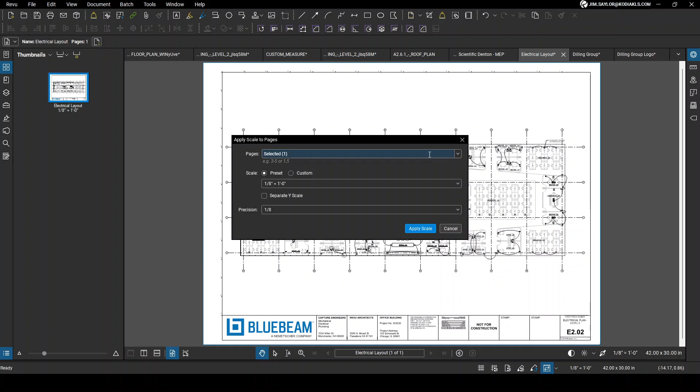Next thing I'm going to do is show you how to do a search for items or fixtures. On this particular drawing, we want to search for these duplex fittings. On your side panel menu, you'll see here next to thumbnails, all your options: Search, and then this is the text search. So if you were looking for, say, like 202 or meeting, you can type that in. If you want to do a visual search, you can click on Get Rectangle, and then you'll have the ability to select just that picture.

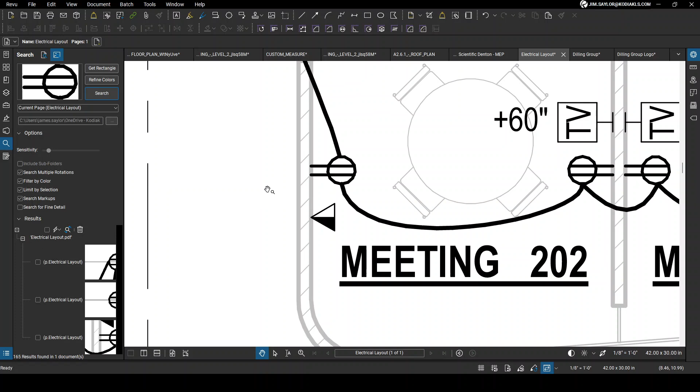We're going to keep it nice and tight, nice and clean. Then we're going to tell it to search. Takes it just a second. And now you'll see it search the entire document. And you can quickly scroll through and scan and look and make sure that it has picked all of the correct fixtures.

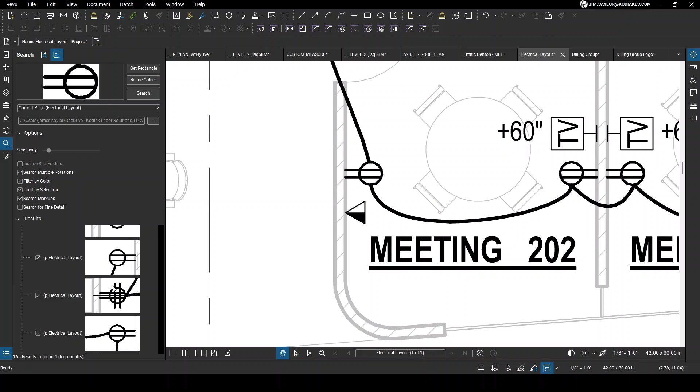So as you can see here, this is a quadplex. It's different. We're going to go ahead and select all items. And then we'll scroll down and unselect the items that don't match. We don't do that one.

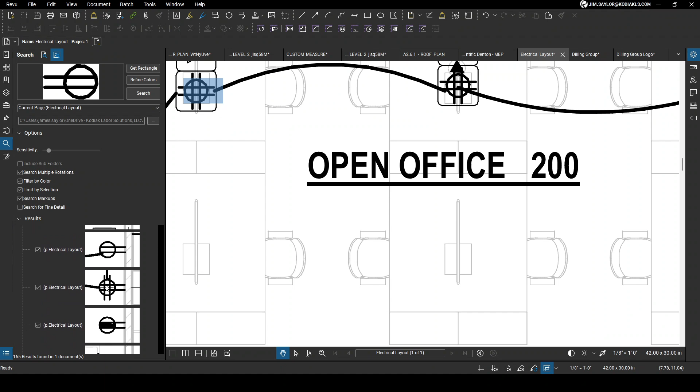This is going to save you a ton of time. Talking with some of the guys, they go through and manually highlight each item or fixture, creating a small box to mark it. This is going to be a lot more efficient. Now you'll still need to go over the whole print to make sure you haven't missed any, but this will definitely get you the bulk of it.

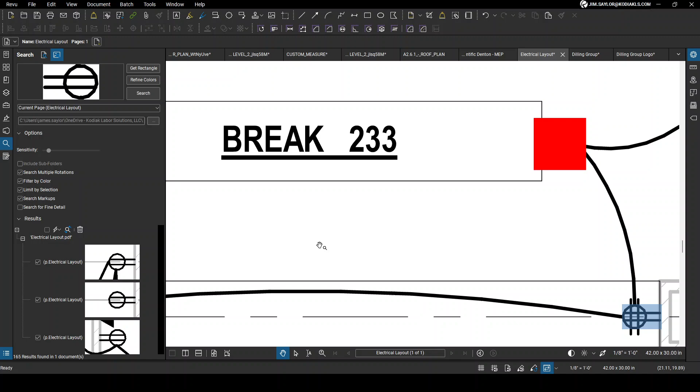All right, so I'm just scrolling back to the top. Now I'm going to click on this electrical icon here, check options. We're going to do an apply count measurement to check. We're going to mark all of these boxes as a square. Now every one of those boxes that it found will now be marked as a red square. You can see that saved a ton of time.

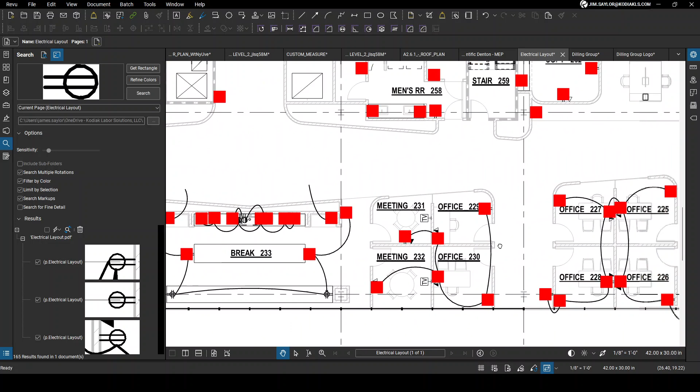If we select one, you can see it counted them. So there's 161. So we'll quickly just look through, see if it missed any. And if it did miss one, all you would have to do is right click on it, resume count, highlight that box that may have been missed, hit the escape key, and now you can see it goes to 162. So we added that one.

So now that all of these are highlighted together, so they're all in one count, if you need to split one of them out, you can right click on it. You can split count. Now this one item is a single. If you wanted to split them all, you could also right click and split all. Now all of them, all 161 of them would be individual. So we'll just go ahead and delete this one.

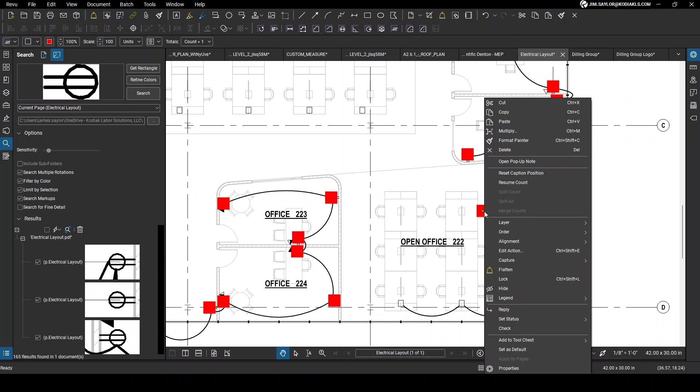And I can walk you through the editing functions for your markup. So if you click on the markup, you can see it highlights all of them because they are grouped together in a count.

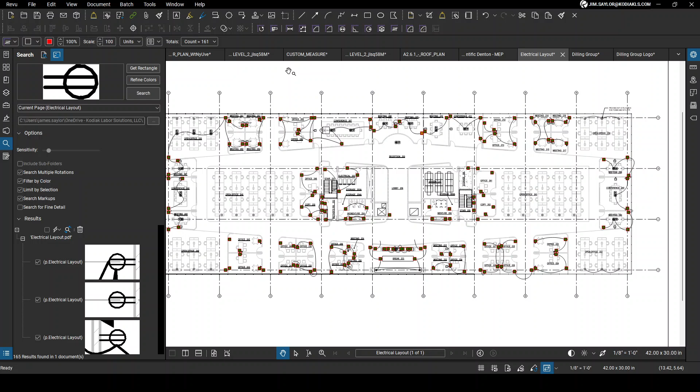You have your options of what you want that square to look like. So you can change the color of the square here. You can change the scale.

If it had labels on it, you could show the caption for it. And when you click on labels, you'll get the ability to edit the font and the font color and the style to go along with that. But we don't have any labels on it, so we're not really worried about that.

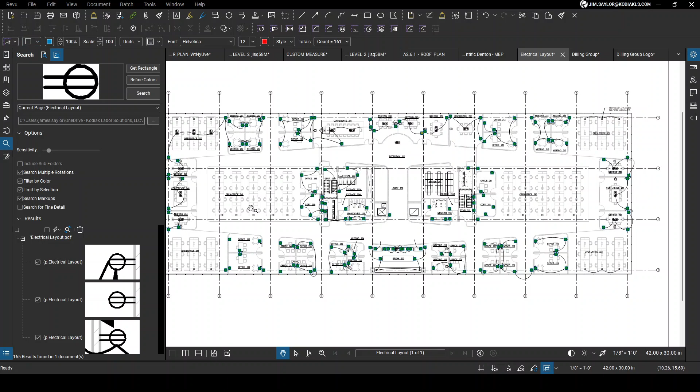So on this particular print, there were duplexes and quadplexes, so we have two different items that we want to search for. So again, I'll show you how to do a search. You want to zoom in, get a nice clear picture of one, so it doesn't have things obscuring the view.

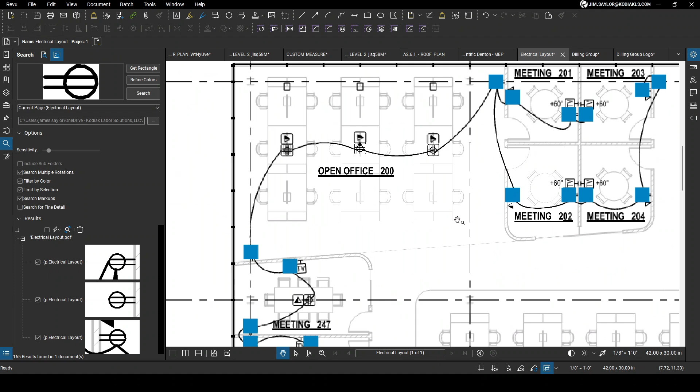And we're still in the search function, so we can get a new rectangle. Try to be picky about it. Make sure that you're getting all up to the edges.

We'll do another search, and we'll go ahead and select all, and we can quickly scroll through. See, it only found 4. Pretty sure there's more than that.

So we can do another search. Get a new rectangle, widen our search area just a little bit more. Do another search. Now we're only finding 3.

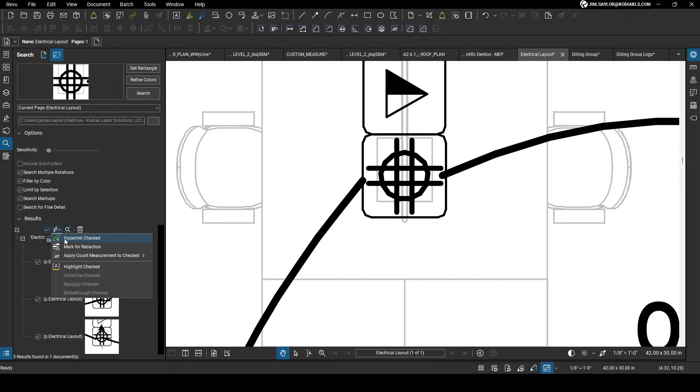We'll go ahead and we'll highlight these and apply the count. We'll still make them red square. Now all the red squares are the quadplex.

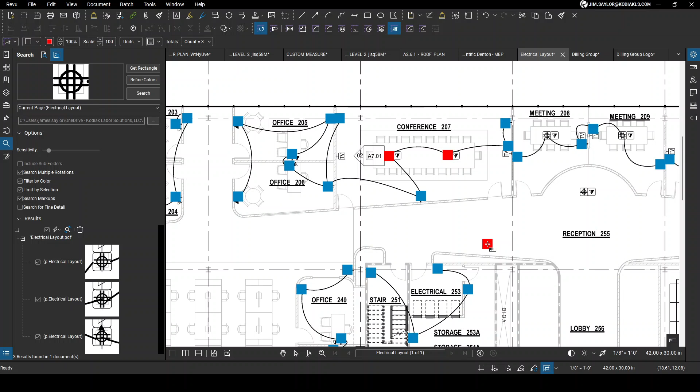And again, if you want to add, you can just right click on one, resume count. Here's one, here's one. You can see your count will go up when you escape out of it. And then hit the escape key.

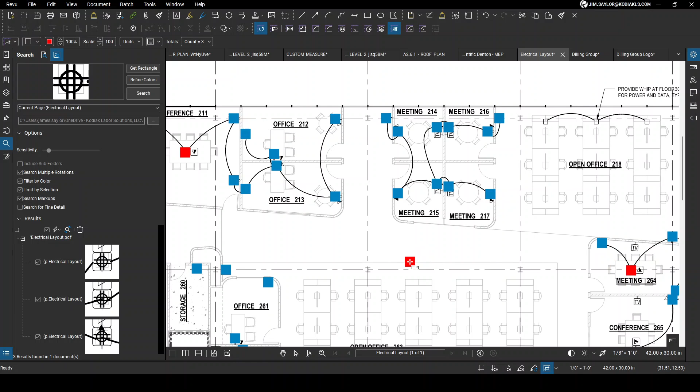So now you can quickly see that there are quadplexes in red, the duplexes are in blue. So the next thing you want to do is connect them with Redlines. We're going to get out of the search just by clicking on the icon for search.

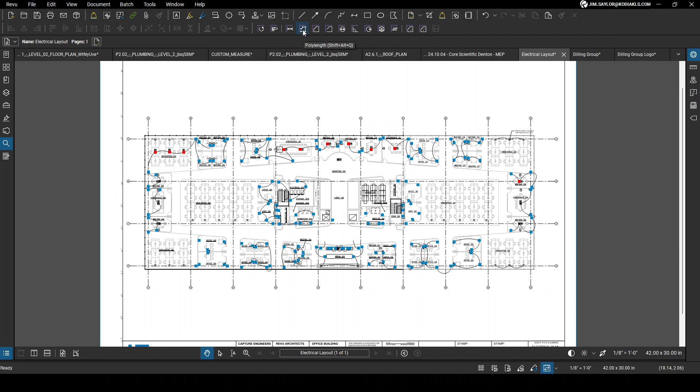And then we're going to create a new measurement redline. You go to poly measurements, that way you can do a continued measurement, or you can do a slope or depth measurement added onto a measurement. We're going to pick the poly.

We're just going to make a straight line, hit enter. Now we have this straight line. I'm going to hit escape so I can get out of the measurement.

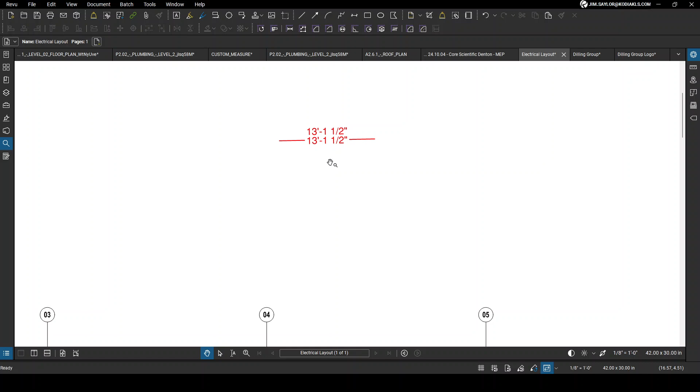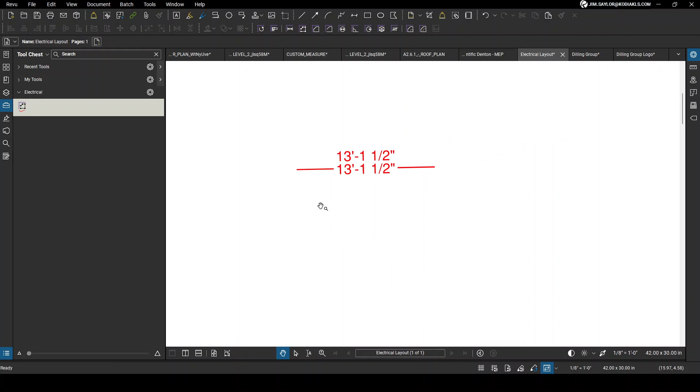Now we don't want to see the measurement and all of that, so we're going to click on our toolbox, our tool chest, and open that up so we can see where we're going to put it. And then we're going to click and edit this type of measurement. So again, the editing functions will show up at the top.

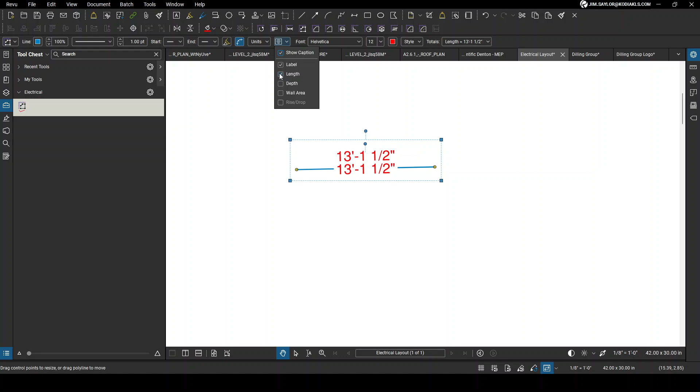You can change the line color. And we'll go back to that unit so you can see here, next to the unit. If you wanted to show the caption or remove the caption, you can do that. If you want the options of it, you can remove the length and the label.

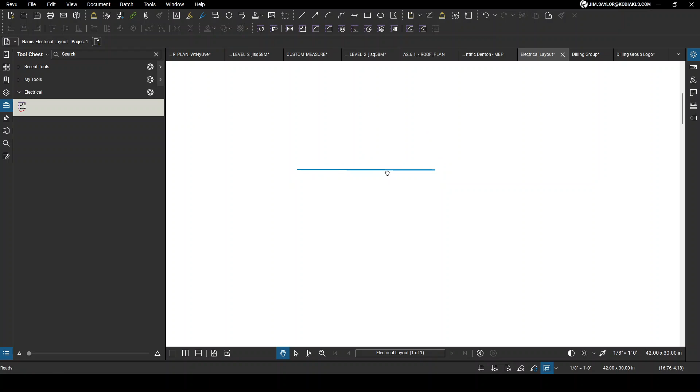We're going to add it to the electrical tool chest. And here you can see there's a difference between this poly length measurement and this poly length measurement.

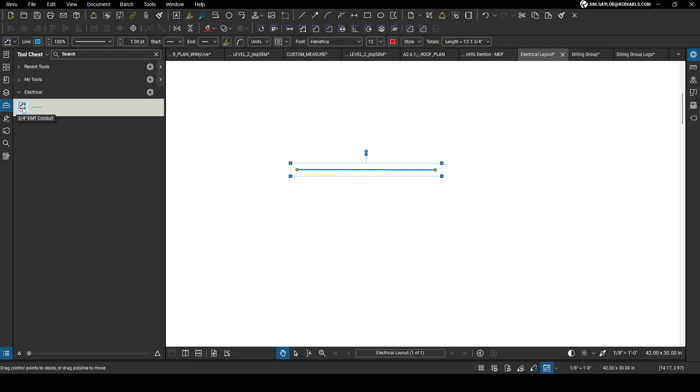This one I've already edited, and it's in a different format, which you just simply change by right clicking on it. And then you can click property mode, or you can right click on it, click drawing mode. To do continuous, we want to make sure that we're in drawing mode.

Now to further edit this, you can click on it. You can add it to the drawing. And then you can click this icon on the top, which is the settings property for that measurement that we created.

So we gave it a line color of blue. You could change the style of the line if you wanted. And what we really want to do is add in either a label or a comment. So we're going to call this a 1-inch EMT conduit.

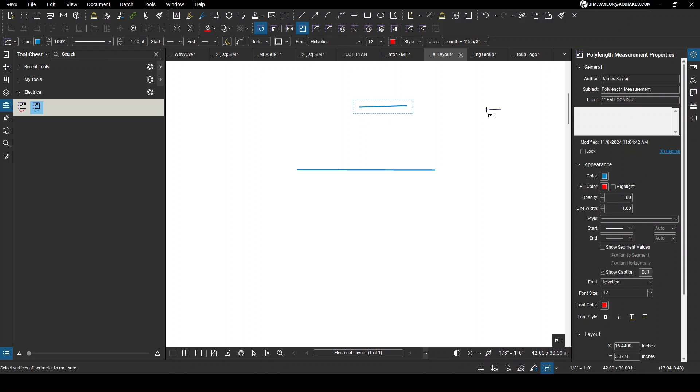Hit escape. Now you can see in settings, I've created this label, called it a 1-inch EMT conduit. That's a label. You can do your subject line as conduit. Since we're highlighted on this one, this is the one that we're actually changing. So if you click off and click on it, you'll see we still have those titles, or the subject and label. But if we click on this one it's still showing up as a poly length measurement.

So the settings that are within those, when you create them, stay when you put it on the drawing. So since this is the one that I really want, and it has all the labels, I can click on it, right click it, add it to the tool chest, and add it to electrical. The one that I created previously still shows poly length measurement 1-inch, but this one says conduit 1-inch.

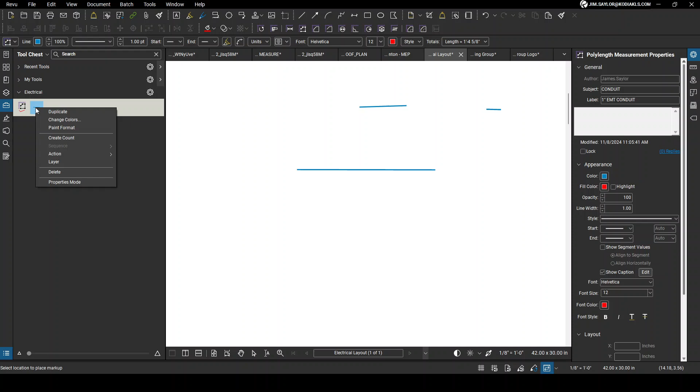So you can right click on that one and delete it. You can right click on the new one, change it to properties mode, hit the escape, and then we can just delete these. And then we can zoom out on our document.

Now the advantage to doing this, where you can create the line, click the next point, hit enter. The advantage of that versus just going up here and clicking on your line measurement - this doesn't have a snap to function. And once you've clicked on it, then you've got to go up and re-click on it.

And you'll notice in the markups list at the bottom, those are just 2 lines. You may or may not need measurement, but if you create the line as we created it with a poly measurement, you'll also get a list of the lines, the measurements. So you get a total measurement, you get an individual measurement in between, you'll also get the label, and you can export this.

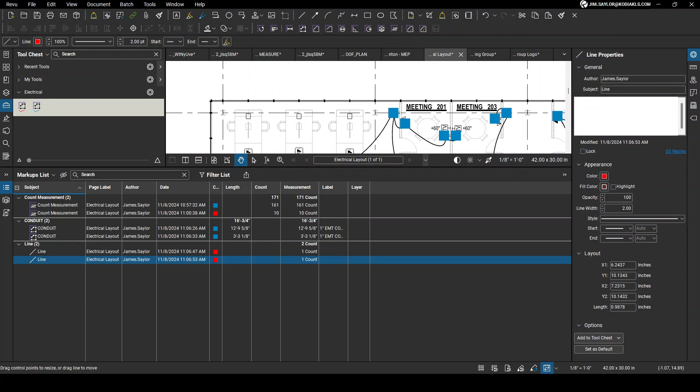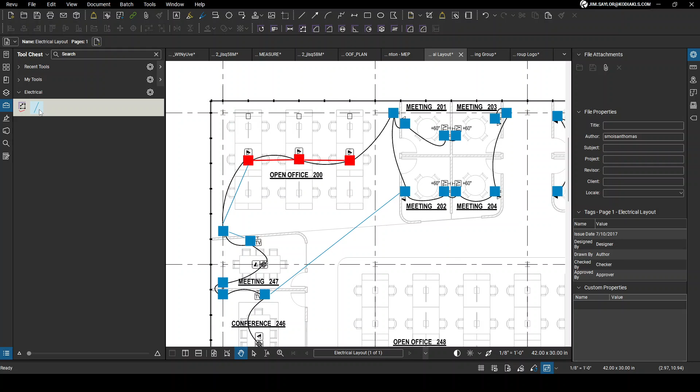Now, if you happen to have this changed to a drawing mode, when you click on it, it will bring down the exact same size line that you had created it under. You can do that, then you can drag it to points. It's just not as efficient. When you click off of it, you're going to have to click it again. So again, make sure that you have this in properties mode. It will make it much faster to be able to go through your document.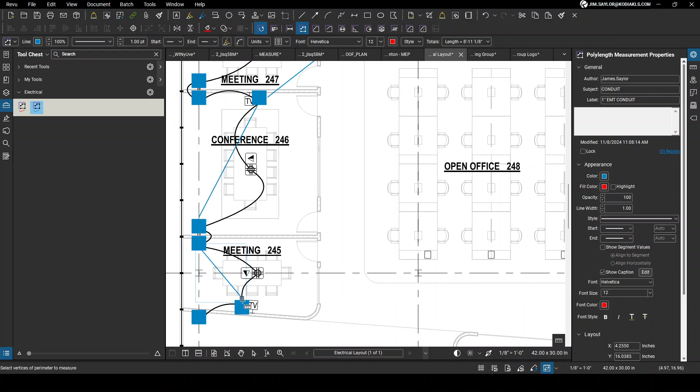And Redline. You can click 1 time and then 2 times at the other end, and that will end it. Or you can click 1 time to start it, click 1 time to end it, and hit enter. That will also end the line. Remember, if you always see a different icon floating around on your mouse, hit the escape button. We are in the pan view, so I can move the document around. That is a quick, simple way to do red lines and the differences and why we create the line.

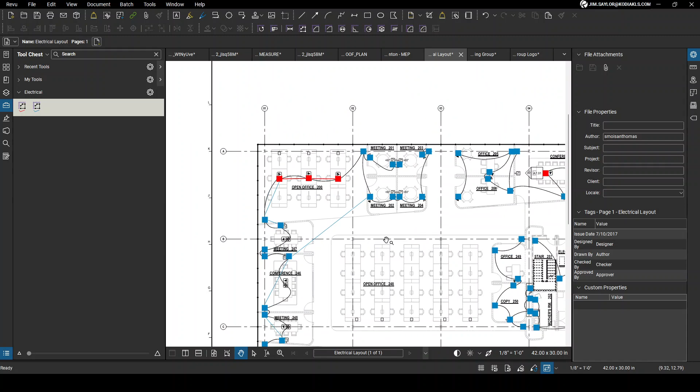Now that we've done lines, you can also see, based on what we created here, you can click on the settings for that tool chest, scroll down to legend, create a new legend, and you can drop that on there if you wanted to see a legend. As you can see here, it picks up the description that we gave it for the conduit. That was in that toolbox. So the subject is conduit, that's what it picked up.

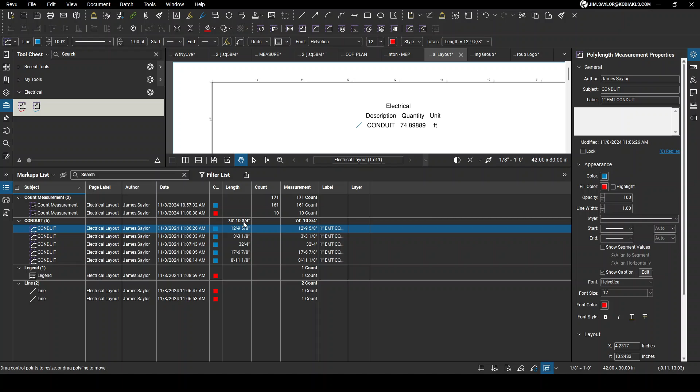It did a quantity, so a total measurement based on what was in the markup here - 74 feet, 10 3/4. Same thing there. And that would go through and list a total for all of the conduit that you listed, or all the redlining that you have listed, whether it's conduit or pipe.

And like everything else, there is an edit function for the legend. So when you click on the legend, you'll see at the top, we have a title option. So we have this titled as electrical, which it pulled from the page. The columns, we're doing it based on subject. If you pick any of these other options, it changes up the columns that you will have in there.

We're just going to leave it as subject, and we can edit the columns ourselves. So if you have a unit or quantity and description, you can add in comment or length. Length is also going to be the same thing as a comment in this particular case. But it's simple enough to change that based on an edit column.

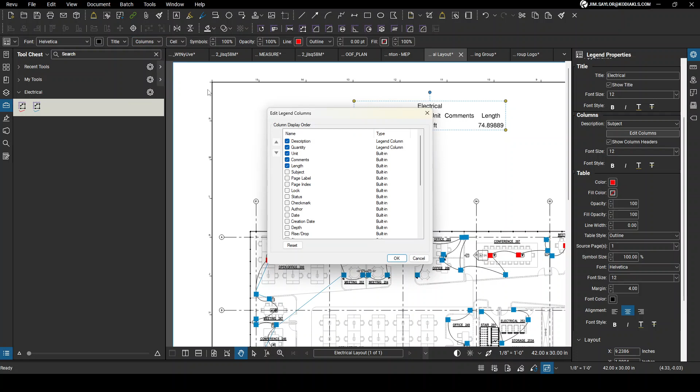You can define the box and the lines around it a little bit more. So the outline right here, the line, is at 0, so we can bump that up. That's an outline around. If you select grid lines, it will separate each one of them and change the line color. And you can go to fill background if you needed to highlight a little bit better so they can see it or read it.

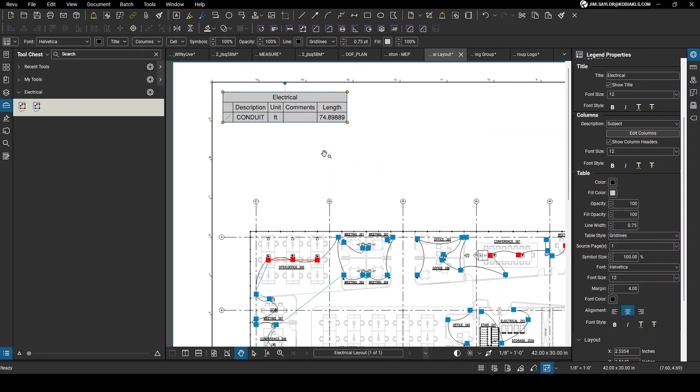And that's how you can do the edit for the legend itself.